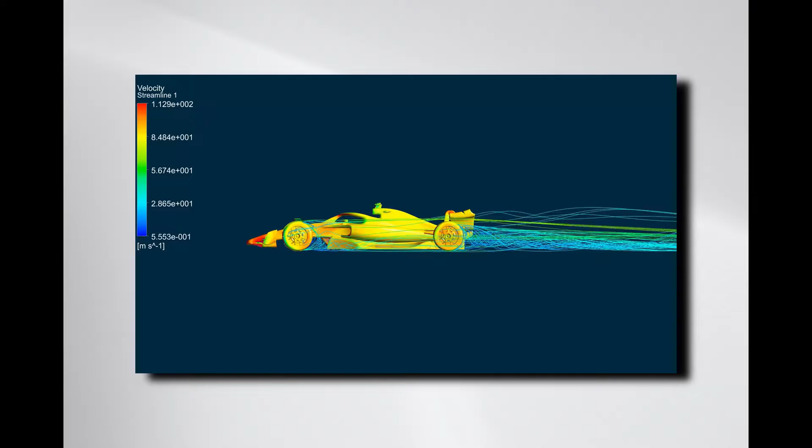Well, suction. Not the suction that might stick Spider-Man to the wall, but a suction due to a downward force created by differences in air pressure. This downward force, which we call downforce, sucks the car into the ground, and these cars, Spider-Man excluded, are abusing a physics principle called ground effect.

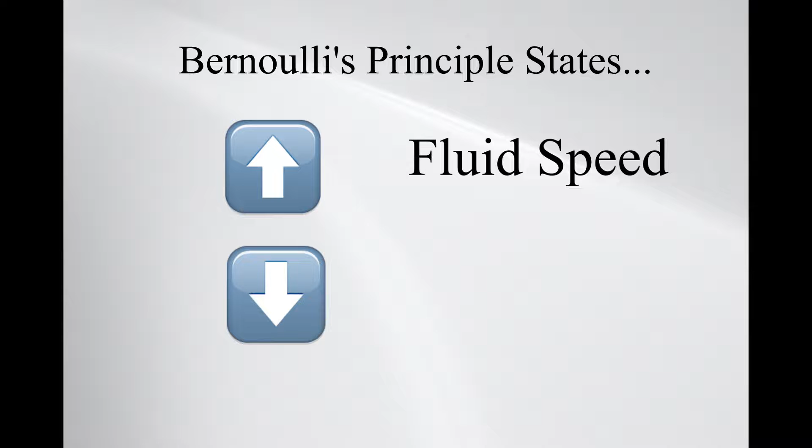Well, actually Bernoulli's principle. So what is this so-called ground effect, and how would it relate to this long equation? Well, Bernoulli's principle is the increase in speed of a fluid that is simultaneously occurring with a decrease in pressure. We know that much. What do you mean? Well, I'll give you a diagram.

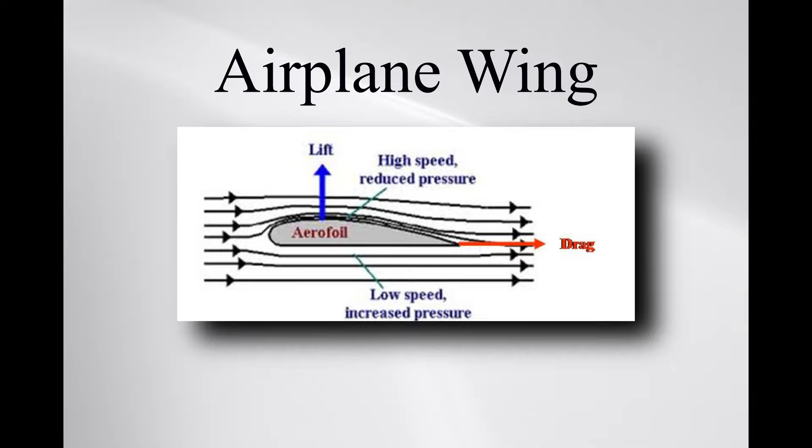Look at this airplane wing. As soon as it is flying, the fluid, air, travels with greater velocity over the wings than under the wings. The greater velocity equals a lower pressure area. A lower velocity equals a higher pressure area under the wings. So when taking off, the difference in pressure will cause the plane to generate lift and climb up.

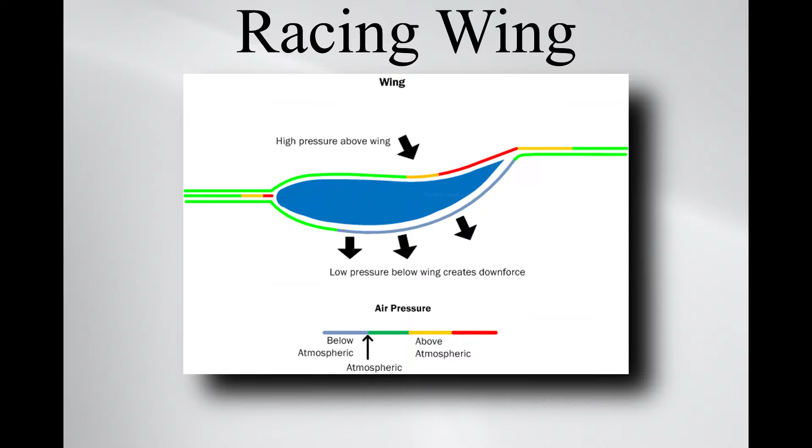Now look at this. Flip the wing and you essentially have a racing wing that, when traveling with greater velocity, will instead generate a negative lift, where the car gains a downward force, or downforce. It sucks the car to the ground by nature of this principle.

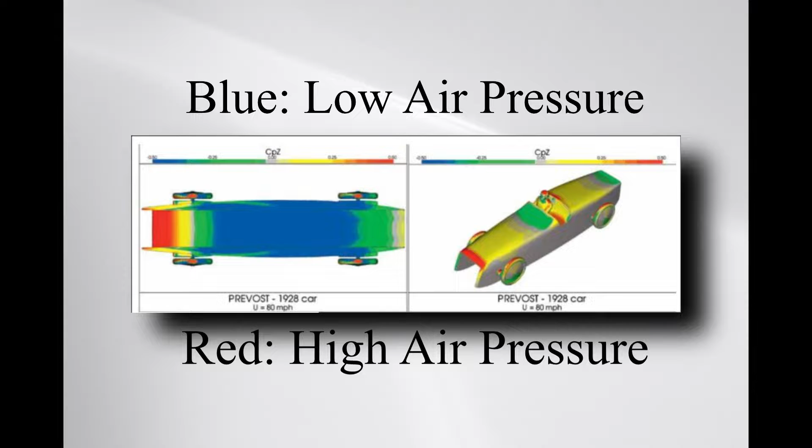Look at this stupid car again. It has the racing wing structure underneath that, by Bernoulli's principle, will now suck that car to the ground. As the lower pressure air enters the underbody of the car and the higher pressure air flows above the underbody, the downforce generated sucks the car to the ground, a so-called ground effect.

So ground effect is abusing Bernoulli's principle to generate downforce as air flows through the car, keeping in mind the ground.

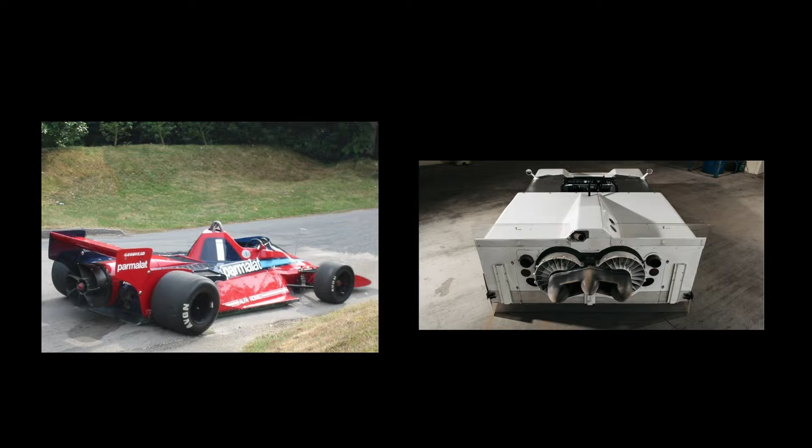Okay, so I've explained the physics part. Now Fonzo, future racing engineer, will explain who thought to implement this concept in racing. He will also explain why the other two photos have fans behind them and these things called side skirts.

Well, it was Colin Chapman's team that first implemented the concept of Bernoulli's principle, and later the ground effect, with their Lotus cars. Now, the use of it can't really be narrowed down to one person, but the first person ever recorded to think of applying Bernoulli's principle and abuse ground effect dates back to 1928 to a Frenchman named René Prévost. As to how it became popular, well, back to the Lotus F1 team.

It was the 70s when the Lotus team first started to investigate the science behind ground effect. As we see with the Lotus 78, they added side skirts to fully take advantage of ground effect, seeing greater downforce with their cars. They continued to see improvement in the performance of their cars, soon winning the Drivers' Championship with Mario Andretti in '78.

What about the fans? Not those fans, these fans. Well, the Chaparral 2J walked so the Lotus could run. It used a massive fan to suck itself to the ground by 2 inches, and again, side skirts, abusing ground effect again, and by and large Bernoulli's.

This meant no oversteer during high-speed turns. It generated 2,200 pounds of downforce. It ran for one season until it was unsurprisingly banned. Taking the fan and the Lotus and the concept of ground effect, we come up with the Brabham car.

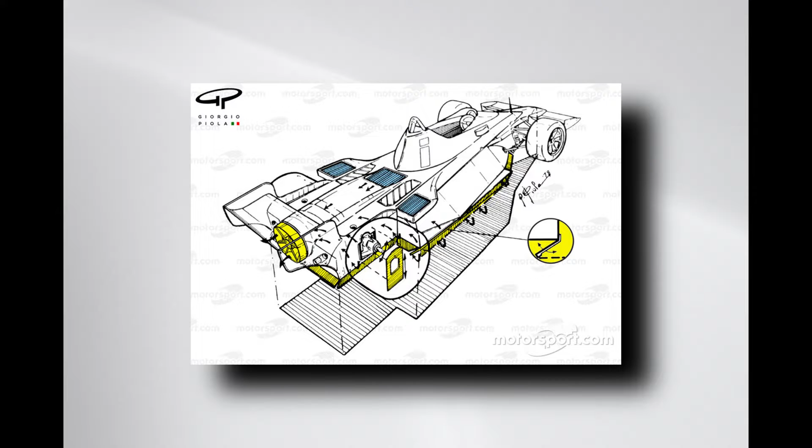Okay, so now a fan. Side skirts. The René Prévost underside. Well, it was probably swiftly banned. Yes, and much later. Abusing ground effect with Formula cars would later get banned too.

So the banning of ground effect, and specifically fan cars and excessive side skirts, was the result of the danger that it proposed. The safety precautions at the time were not enough to prevent accidents from the speeds ground effect gave the cars. Sure, the cars would suck themselves to the ground, but that's also a problem. As the side skirts lose contact from the ground, the car loses suction quickly, leading to an instant loss in downforce and a crash. An end of an era in Formula One racing, but in and outside of Formula One, Bernoulli's principle still applies.

Okay, the racing aspect is cool and all, but obviously it isn't functional for my average Corolla to have a fan on its rear end. How will Bernoulli's principle and ground effect benefit the average driver? I was going to get to that.

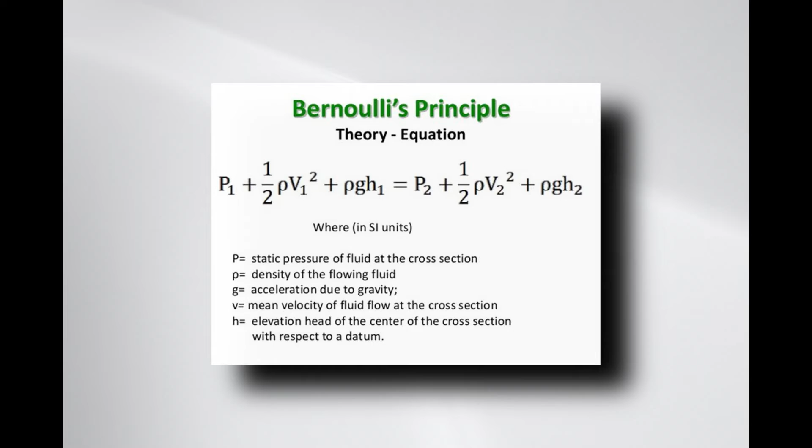The downforce generated through Bernoulli's principle and ground effect can help the average driver in several ways. As the downforce begins to lower the car to the road surface at speeds around 65 to 80 kilometers per hour, the downforce helps to keep the fast-moving vehicle and its tires to the surface of the track or the road. The added downward pressure on the tires results in more grip or friction with the road surface, which equates to a car easier to handle.

The downforce also lowers the car during speed and its center of gravity, which lowers its pitch and roll risk. Definitely very useful on the highway when trying to avoid another car.

We can demonstrate the benefits of downforce during high speeds using a driving simulator, in this case BeamNG. One of the best ways, I think, to demonstrate the effectiveness of Bernoulli's principle and ground effect is by driving a Formula 1 car upside down a tunnel.